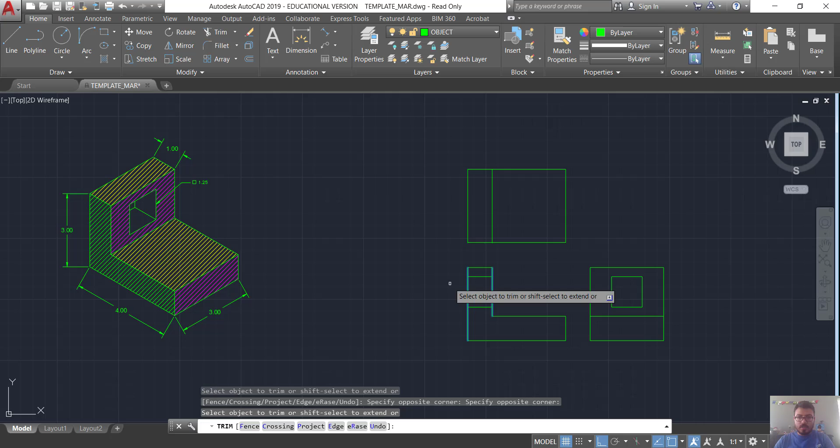Once we have that done, we can start projecting our lines over. I'm going to draw my projection to my front face, do my next projection, then trim to these 2 faces and switch these to hidden layer.

Now, because it's a perfect square and it's perfectly dead center, I could technically just copy these 2 lines up to my top view, but just to show you guys that process of that 45-degree angle to project lines over again, I'm going to do it with my 45-degree angle as I showed you last time. So I drew a line at 45 degrees, I'm going to draw a line up to my 45-degree line from each side of my square, and then draw where they hit that 45 going across.

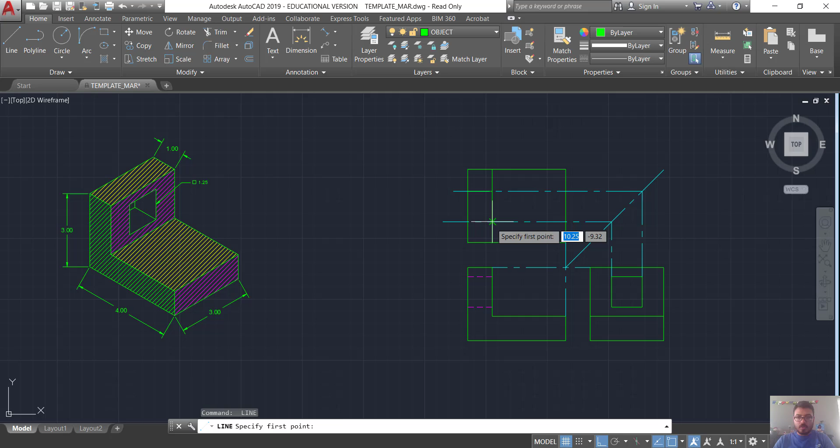And then I can switch to my object layer and essentially trace it out. I should have actually switched to my hidden layer, but that's an easy fix. And there we go. Now we have a square opening inside our part, with the feature hidden on the other 2 faces. Once again, square opening. If you're wondering what this little square back here is, that would essentially be the opening on the back side of the face, you can see through.

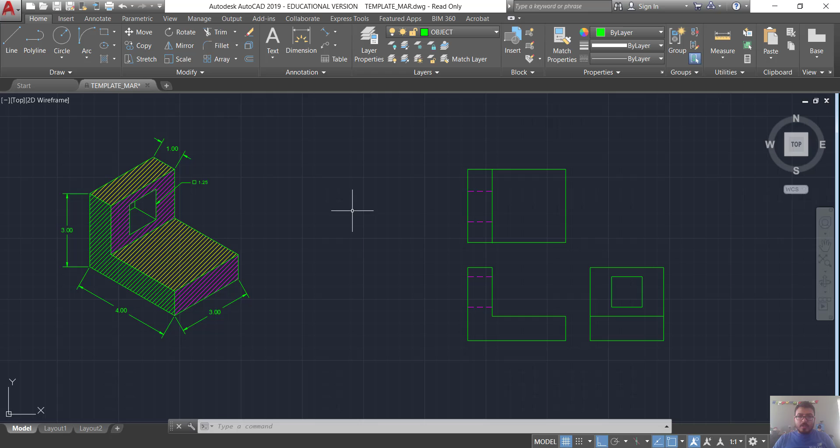So now we have the square done. We can go down and look at the other thing I wanted to go over, which would be circles. Now that we have the radius for this circle, we can go ahead and start drawing these here on the screen.

First things first, I want to draw the circle that goes in the center of this face. Then afterwards, we'll go into the curves on each side of the top portion of our L, just so you can see how that is mimicked in the view. I'm going to draw a line dead center, then draw a circle with a radius of 0.50, or 0.5. Once I have that, I can delete that line and start projecting these over.

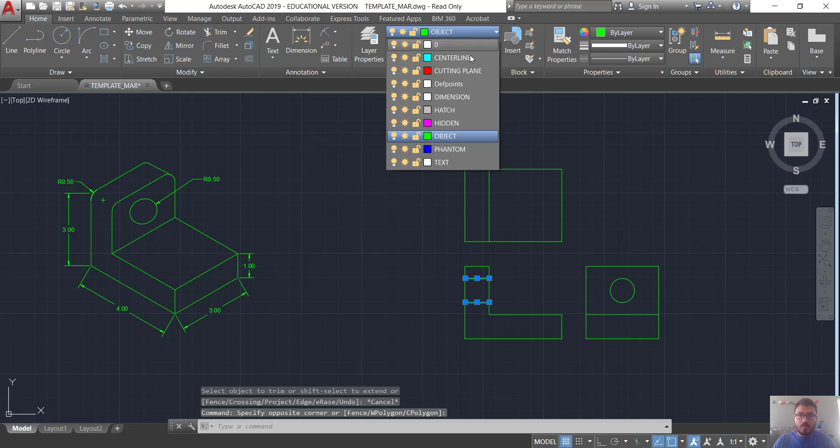Once again, they would be hidden because they are not visible, and the same concept of doing the 45-degree. I'm just trying to be repetitive so you guys can see it as many times as possible, because this is going to be a useful trick for you when you get to more complicated parts in the near future.

Come back and draw this piece and this piece. I can delete these. I'll match my properties here. Now that I have these, I can go and put my center marks and center lines.

So I need to go to the Annotate tab at the top, make sure my center line is set, hit center marks, select my circle, and it automatically does my center mark. I can do my center line, select my two lines, hit it again, do these other two, and now I have my center marks and center lines. That is the easiest way to get it done. It automatically puts the offset at the correct distance it's supposed to be at, and it looks a lot cleaner and more uniform than trying to attempt your center lines manually.

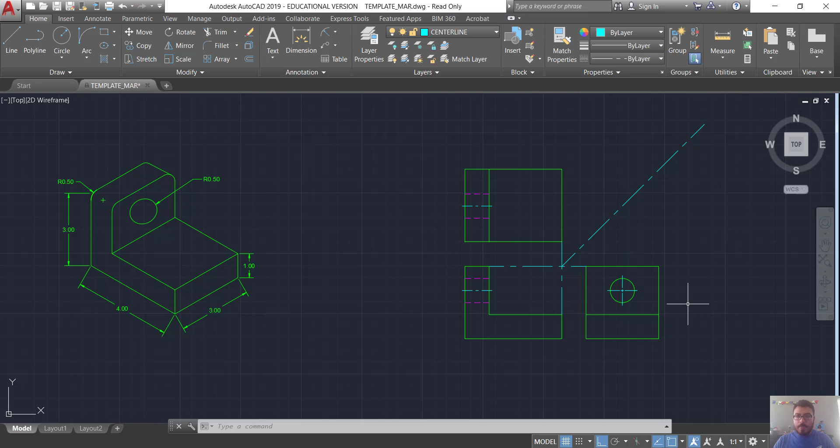Now for this 0.5 radius curves on each end of the right face, I can either draw a circle and try to paste it in, or use my fillet command. Click fillet, hit R for radius, my size being 0.5 or 0.50, select my two faces, hit enter, select my two faces, and there we go. Now, because this is at an edge, technically you do not need to project the line over onto the other views.

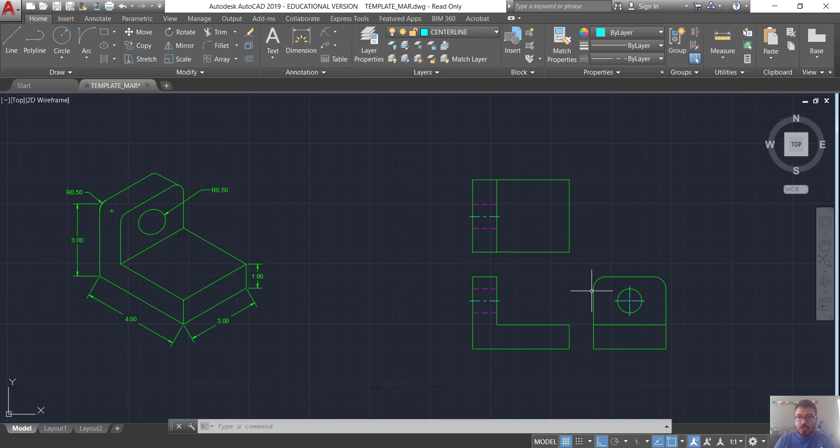Technically you do not need to project the line over onto the other views, because if you were looking at it from a far distance, that line would not be visible. So imagine we're looking at this from a far distance, like grabbing your phone or laptop, putting it far away from you, and when you look at it, you're not going to be able to tell where it curves away from you. That's if your laptop or phone have rounded edges—you wouldn't be able to tell it's curving away from you, especially looking at it dead on from a far distance. So because of that, we do not represent them.

All right, other than that, that's basically it for orthographic views.